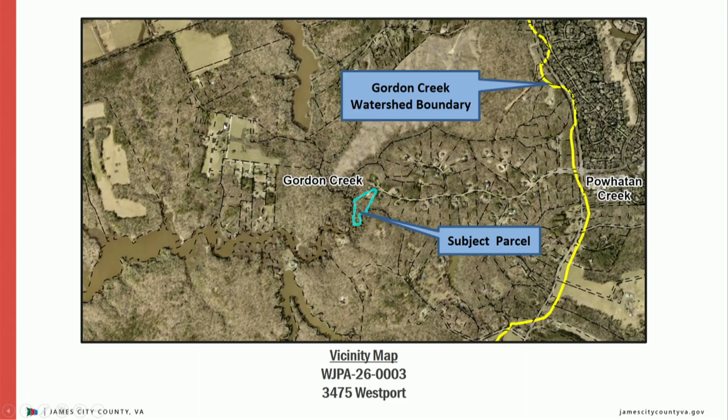A previous permit for a pier and kayak launch was approved by this board on November 10th, 2021 under WJPA 21-0043, VMRC number 21-1556. The original proposal included a pier totaling 492 square feet in length, along with a 30-foot gangway and floating dock that would transverse approximately 68 square feet of tidal wetlands.

What was constructed differs from what was approved. The area of the gangway and floating pier beyond the mean low water that was permitted was 126 square feet, but what was constructed was 243 square feet. The existing floating pier extends 7 feet channelward beyond the originally permitted edge of the pier.

So what we have here is the current as-built. I have what was originally approved outlined in gray here, along with mean high water and mean low, and the original proposed pier and floating dock.

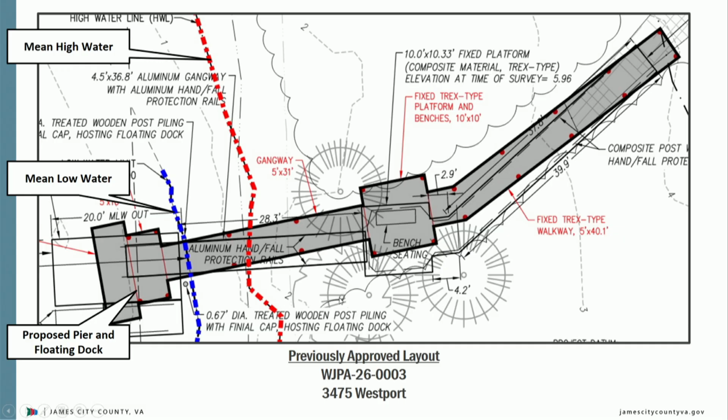And then looking at the same image again, but looking at what was actually constructed here in orange. We have that kayak launch here, along with the railings that extend out, and then the existing floating pier, and then the gangway, seating area, and walkway. And then just an overlay of the two to show you the difference between what was approved versus what's now constructed.

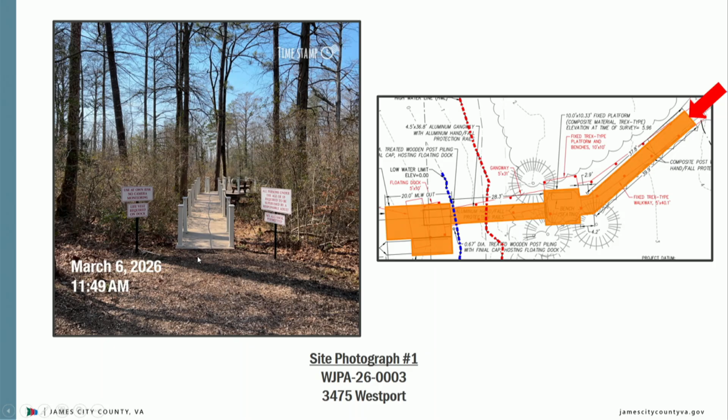And then just some current site photos. This is the entryway to that pier with the walkway here. Moving a bit further up, we have that little landing area here with the bench, as shown here. And then there's that gangway.

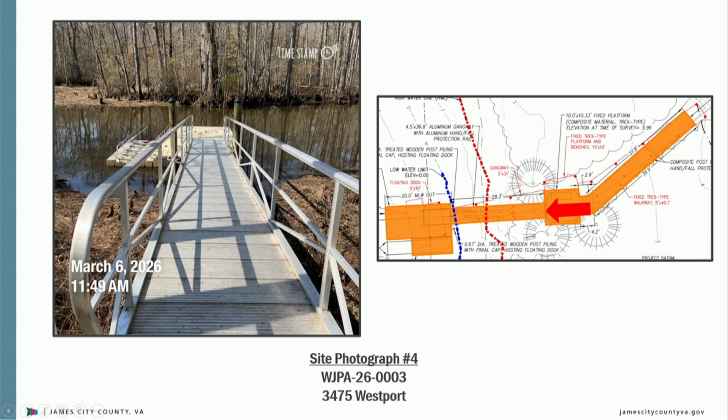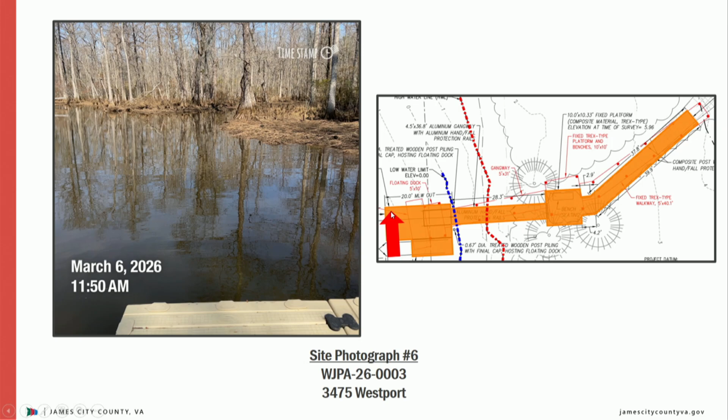Moving a bit closer, we see the floating dock along with the kayak or canoe slip. And then just a better shot of that with the railings extending outward. And then just a view from the corner, furthest extent of the floating dock, looking this way, and then from the other side, looking out that way towards the kayak boat launch.

On February 1st, 2025, the Wetlands Mitigation Compensation Policy of the Code of Virginia, Chapter 4 VAC 20-390-10 et sequitur was amended. Virginia, as a Chesapeake Bay program partner, is committed to achieve a no net loss of existing wetlands acreage and function in the signatories' regulatory programs. In order for a proposed project to be authorized to impact wetlands and compensate for the wetland loss in some prescribed manner, the following three criteria must be met.

All reasonable mitigative efforts, including alternative siting which would eliminate or minimize wetland loss or disturbance, must be incorporated in the proposal. The proposal must clearly be water dependent in nature, and must demonstrate clearly its need to be in the wetlands and its overwhelming public and private benefits.

If the proposed project cannot meet one or more of the above criteria, the project must be denied or must occur in areas outside of wetlands. Should it satisfy all three criteria, however, compensation for the wetland loss is required.

The sequence of acceptable mitigation options should be as follows: mitigation bank, approved in-lieu fee program, permittee responsible on-site and in-kind mitigation, or permittee responsible mitigation through off-site or out-of-kind mitigation within the same watershed. If compensation is required, it should be a condition of the permit.

Staff has reviewed the application and finds that this project meets the three criteria outlined above. Staff has reviewed the application and recommends approval as presented, with no additional conditions. If you have any questions, I'd be happy to take them at this time.

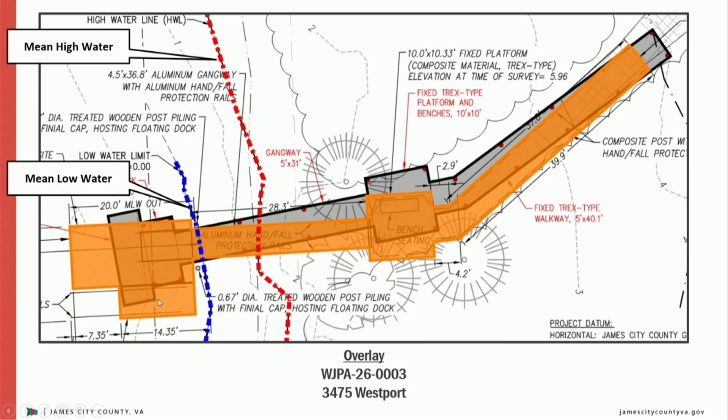The originally permitted platform that was out there was a little bit too small for the kayakers that were going out. Any questions that you have?

Questions from the board? No, appreciate that very much. Are there any comments from the public regarding this?

Okay, I will then move the discussion back amongst the board. Chairman, fairly straightforward, slight field adjustment. The portion channelward of mean low water is not in our jurisdiction, so it seems like a slight modification. No issue for me.

Okay, go ahead and close the public hearing and entertain a motion to deny or accept the proposal.

Motion to adopt the resolution to grant the permit request for Wetlands Board case number WJPA 26-0003. Wilson, motion is to adopt.

Mr. Roadley, yes. Mr. McElroy, yes. Mr. May, yes. Ms. Bowie, yes. Mr. O'Brien, yes. Motion passes 5-0.

We will now move on to board considerations. I believe we have one particular extension request. Ms. Grosjean?

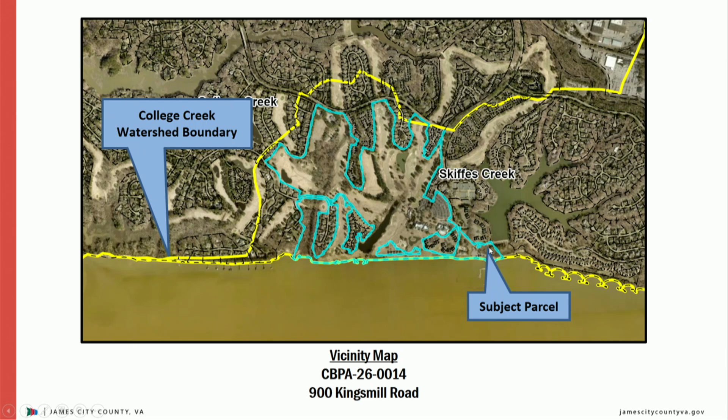Total impacts to the RPA associated with this proposal equate to 220 square feet within the 50-foot seaward RPA. Required mitigation for this amount of impervious impacts equals 1 planting unit, 1 canopy tree, 2 understory trees, and 3 shrubs. The applicant will be required to submit a mitigation plan equaling 1 planting unit, 1 canopy tree, 2 understory trees, and 3 shrubs as a condition of approval, which they have met since the publishing of the staff report.

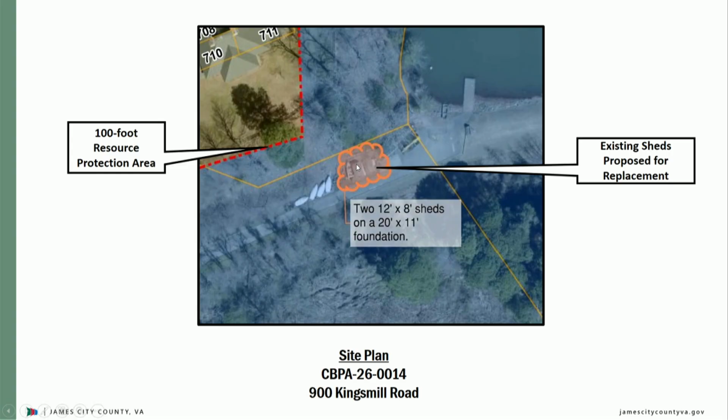Again, we have the site plan. The 2 sheds here are proposed for replacement, and this is the proposed mitigation plan. Recent photography of the site. The mitigation is proposed in this general area, and then these are the 2 sheds proposed for replacement.

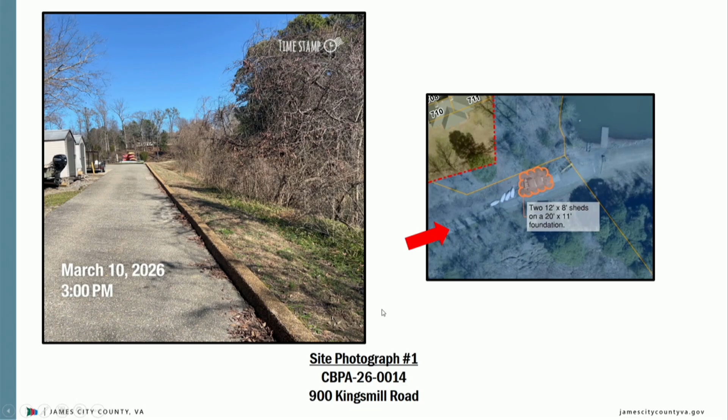Staff has evaluated the application and exception request for the installation of 2 sheds. This application meets the ordinance conditions in sections 23-11 and 23-14 and should be heard by the board because the project is outside the scope of an administrative approval.

The board may grant exceptions to section 23-7 if the application meets the following 5 conditions, which you have before you. Staff has reviewed the application and exception request and has determined the impacts associated with the proposal to be minor for the proposed development.

Staff recommends approval for this exception request, and if the board wishes to approve the request, staff recommends the following conditions be incorporated into the approval.

The applicant must obtain all other necessary federal, state, and local permits as required for the project. The applicant must submit a surety of $1,000 in a form acceptable to the James City County Attorney's Office to guarantee the mitigation plan equaling 1 planting unit, 1 canopy tree, 2 understory trees, and 3 shrubs.

The applicant must submit a mitigation plan equaling 1 planting unit, 1 canopy tree, 2 understory trees, and 3 shrubs. The applicant must obtain site plan approval from the planning division prior to installation of the sheds.

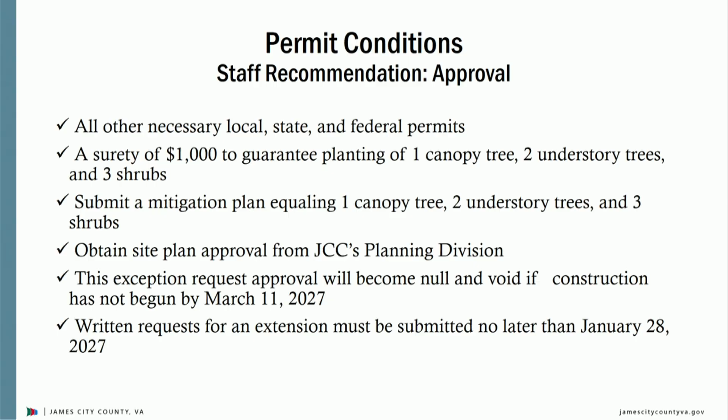This exception request approval will become null and void if construction has not begun by March 11th, 2027, and written requests for an extension to an exception must be submitted to the SRP division no later than January 28th, 2027, 6 weeks prior to the expiration date.

Be happy to take any questions at this time. Any questions for staff?

Thank you. With that, I'll open the public hearing. Would anybody care to address the board on this matter? Hearing none, I'll pull it back to the board.

Any discussion, further discussion? Chair, I think this is a reasonable request, and I would agree with the county's recommendation for approval. I concur. I will close the public hearing.

Do I have a motion? I'll make a motion to adopt the resolution to grant the exception request for Chesapeake Bay Board case number CBPA 26-0014 at 900 Kingsmill Road.

Mr. Wilson. Motion is to adopt. Mr. McElroy, Yes. Mr. O'Brien, Yes. Mr. May, Yes. Ms. Bodie, Yes. Mr. Roadley, Yes.

Motion passes 5-0. Next item on the agenda is CBPA 26-0004 at 4455 Pleasant View Drive.

Emily. Again, Board, Emily Grogine, Watershed Planner, presenting CBPA 26-0004.

Mr. Michael Powell has applied for a Chesapeake Bay exception for encroachments into the RPA buffer for the extension of a deck located at 4455 Pleasant View Drive within the Powhatan Village subdivision and the Powhatan Creek watershed.

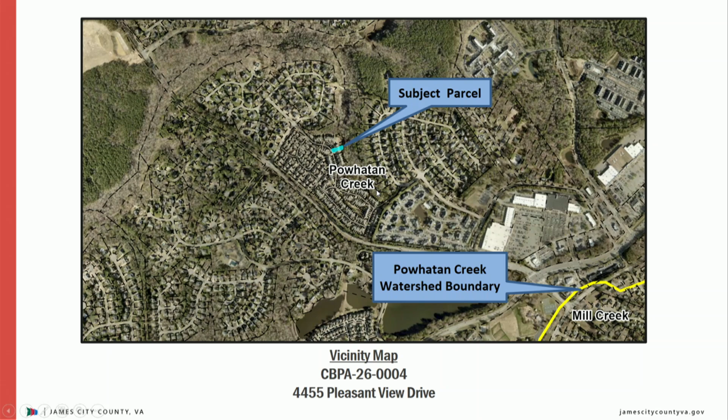Here we have that Powhatan Creek watershed boundary outlined in yellow, along with the subject parcel in blue here, which we will zoom in here with the recent aerial photography.

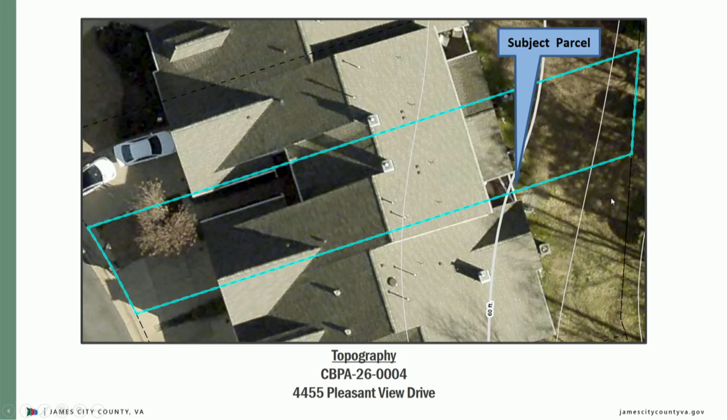The current existing 10x8 deck, along with the topography, as you can see, it kind of just slopes off to the rear right portion of the property, along with the current RPA buffer.

The 50-foot seaward starts right just past that property line, so all the work that's occurring will be strictly within the landward buffer.

The total lot size of this property is 0.076 acres, of which 39% is located within the RPA. The applicant is proposing to expand an existing 80 square foot raised deck at the back of the home by an additional 328 square feet.

Total impacts to the RPA associated with this proposal equate to 328 square feet of impacts within the landward 100-foot RPA buffer. Required mitigation for this amount of impervious impacts equals 1 planting unit, 1 canopy tree, 2 understory trees, and 3 shrubs.

Due to site restrictions, the applicant will be required to pay $500 into the county's Chesapeake Bay Mitigation Fund in lieu of physical plantings.

So we have the proposal here. I know that the line here shows it going over the property line, but that's just because GIS, as you know, can be skewed. This does not allow them to encroach on anyone's property, which they don't plan on doing.

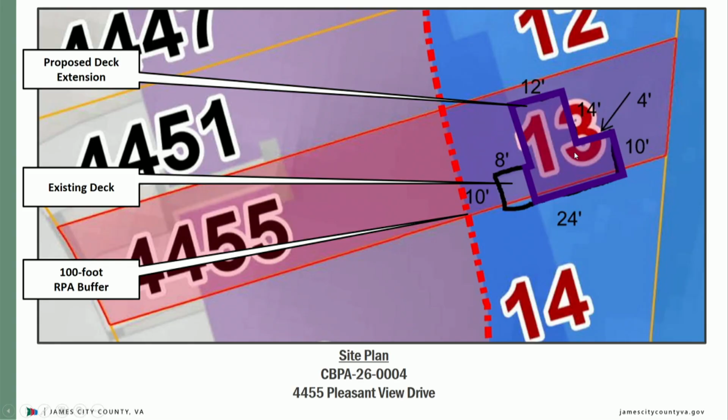This is the existing 8x10 deck, along with the proposed extension outlined in purple here. And then just a close-up as we go through these current site photos.

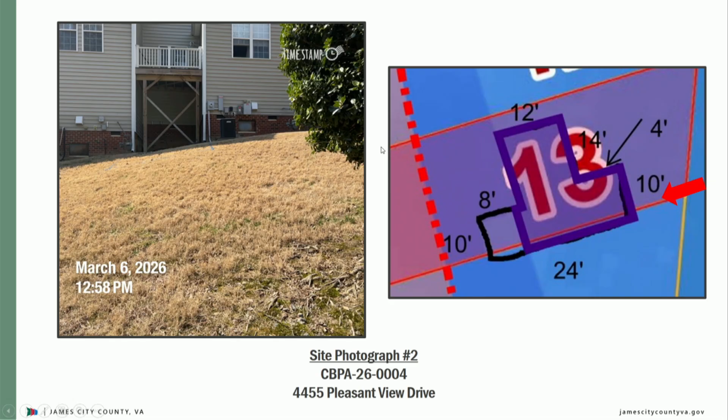So the furthest extent on this side of the deck is going to be right about here. And then the furthest extent on the other side is going to be right about here, toeing that property line. Then just moving closer in where it's going to connect to the existing deck here.

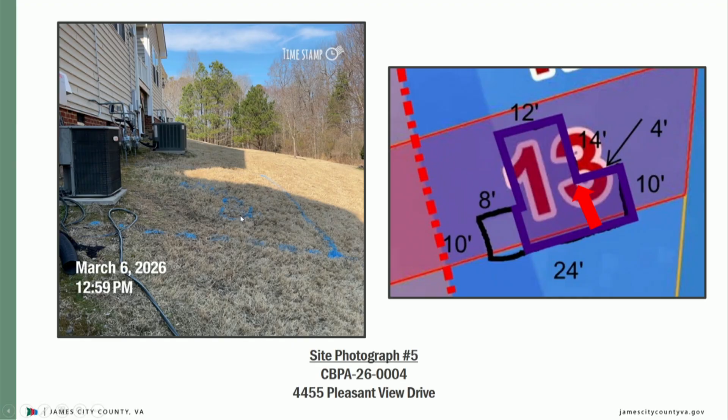You can see it's kind of marked out in blue. And then just turning to the right to see that furthest extent corner. And then moving over here to look at the proposed portion here, where it'll end right about here. And then just looking at from the other side, again, just showing you kind of that outline of the extent of the proposed deck extension.

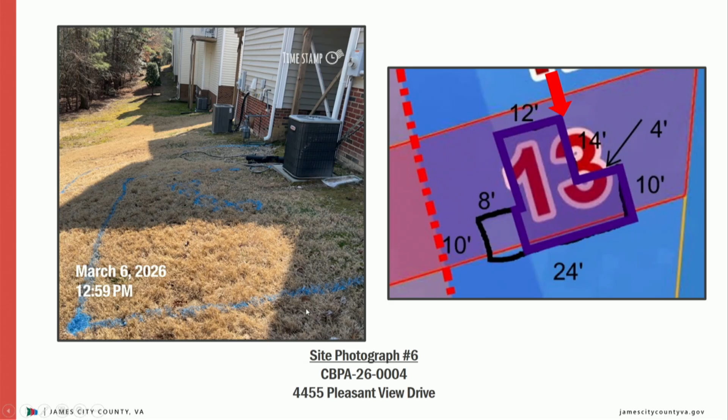Staff has evaluated the application and exception request for the extension of a deck. This application meets the ordinance conditions in sections 23-11 and 23-14 and should be heard by the board because the construction of a deck is accessory in nature.

The board may grant exceptions to 23-7 if the application meets the five conditions outlined before you. Staff has reviewed the application and exception request and determined the impacts associated with the proposal to be minor for the proposed development. Staff recommends approval for this exception request, and if the board wishes to approve, staff recommends the following conditions be incorporated into the approval.

The applicant must obtain all other necessary federal, state, and local permits as required for the project. The applicant must submit a payment of $500 to the county's Chesapeake Bay Mitigation Fund in lieu of mitigation plantings. The applicant must permanently stabilize denuded soil underneath the deck to prevent erosion.

This exception request approval will become null and void if construction is not begun by March 11, 2027, and written requests for an extension must be submitted to the Stormwater and Resource Protection Division no later than January 28, 2027, or six weeks prior to the expiration date. If you have any questions, I'd be happy to take them at this time.

Any questions for staff? I do have one. Are there other decks similarly situated that extend out into the RPA in this area? For that section of townhomes, not from what I saw.

This references permanent stabilization underneath the deck. Is there a recommendation of what that should look like? Typically it's some sort of crushed gravel or mulch. We're kind of leaving it vague, so it's up to the applicant, whichever suits their needs best.

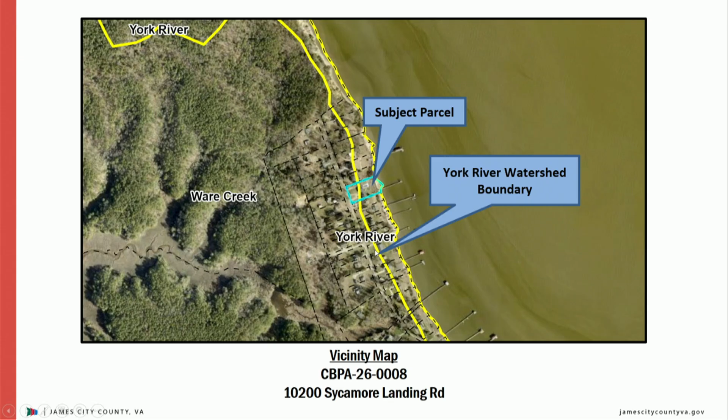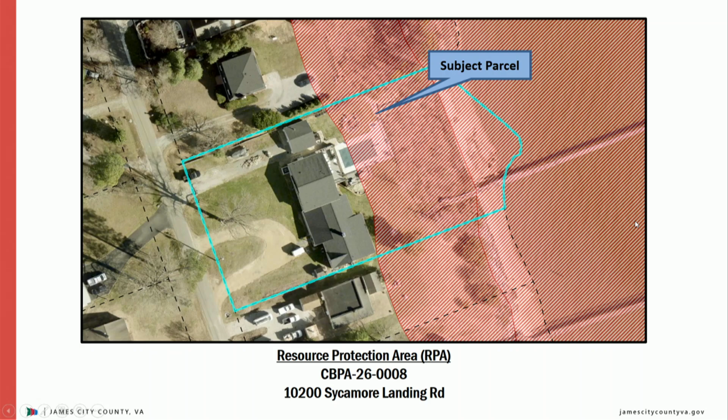Here we have a vicinity map showing the subject parcel outlined in blue and the watershed boundary in yellow. Looking closer at the property, this is the project area, current topography, RPA, and FEMA floodplain.

The total lot size of this property is 0.86 acres, of which 40% is located within the RPA. The applicants are proposing to construct a retaining wall behind the existing dwelling to stabilize the yard above an existing retaining wall.

Total impacts to the RPA associated with this proposal equate to 170 square feet of new impervious in the landward 50-foot RPA. Required mitigation for this amount of impervious impacts equals half a planting unit. The applicants have submitted a mitigation plan equaling half a planting unit, 2 understory trees and 2 shrubs, therefore satisfying county mitigation requirements. The previously existing unapproved fire pit shown in the previous photos

has already been removed and is not proposed to be replaced. Here we have the site plan showing that fire pit is proposed to be removed and not reconstructed.

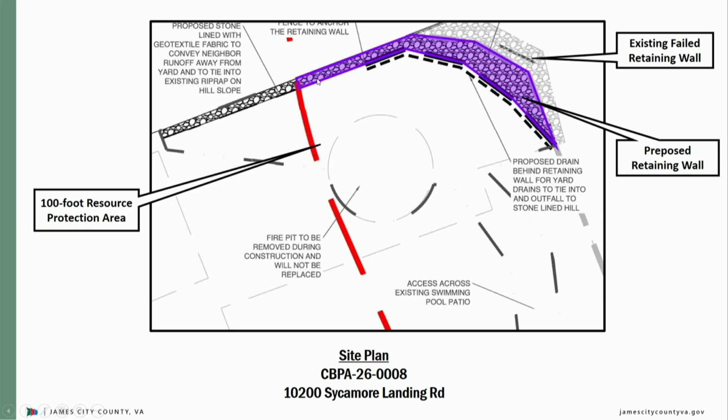And this is the proposal for the new retaining wall here, and the proposed mitigation plan here. A section of the retaining wall showing the existing here and the new construction here.

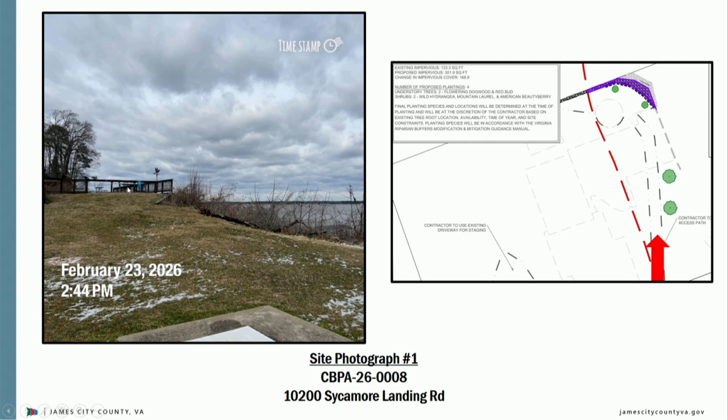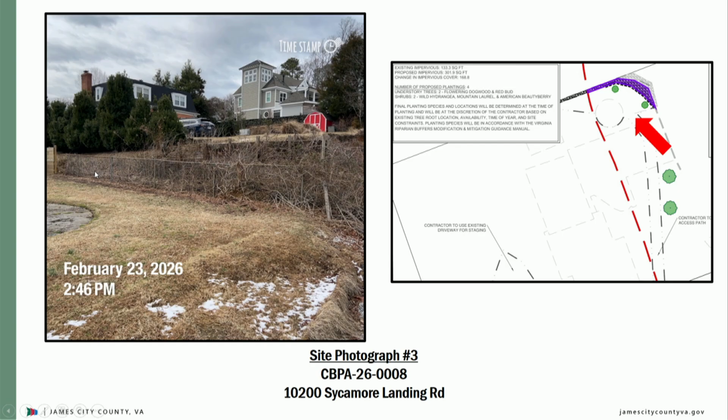Recent site photos. Here you can see where the 2 understory trees are proposed, the previously existing fire pit, and then looking back towards the beginning of the retaining wall, coming along this fence here and around this area. The existing failed retaining wall, and then the slope behind it.

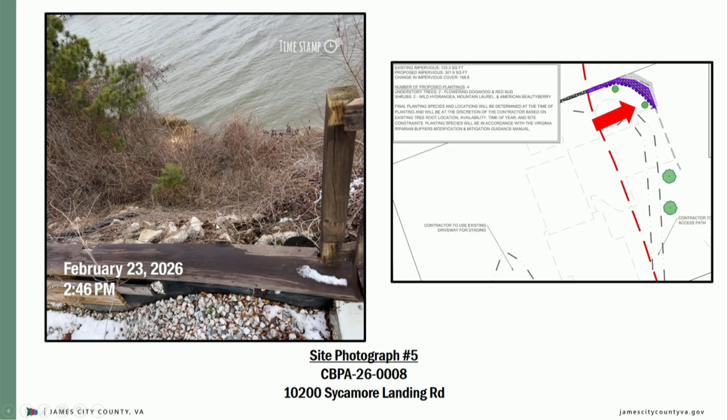Staff has evaluated the application and exception request for the construction of a retaining wall. This application meets the ordinance conditions in sections 23-11 and 23-14 and should be heard by the board because the construction of a retaining wall is considered accessory in nature.

The board may grant exceptions to section 23-7 if the application meets the following 5 conditions, which you have before you. Staff has reviewed the application and exception request and has determined the impacts associated with the proposal to be minor for the proposed development.

Staff recommends approval for this exception request, and if the board wishes to approve the request, staff recommends the following conditions be incorporated into the approval.

The applicant must obtain all other necessary federal, state, and local permits as required for the project. The applicants must submit a surety of $500 in a form acceptable to the James City County's Attorney's Office to guarantee the mitigation plan equaling 2 understory trees and 2 shrubs.

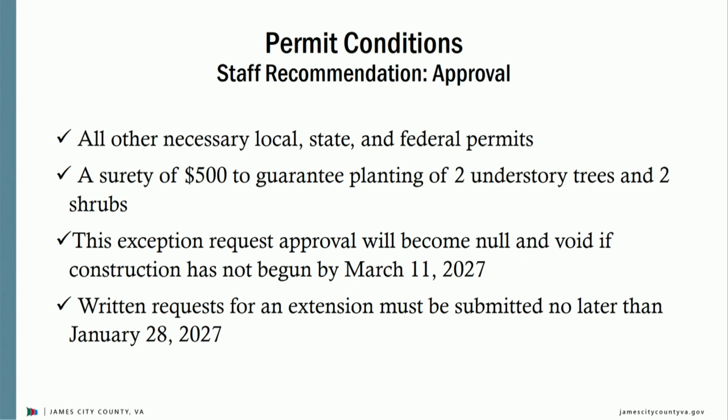This exception request approval will become null and void if construction has not begun by March 11th, 2027. Written requests for an extension to an exception must be submitted to the SRP division no later than January 28th, 2027, 6 weeks prior to the expiration date. I'd be happy to take any questions at this time.

Questions for staff? You indicated the existing retaining wall is going to stay there - does that provide any benefit? I will defer that to the applicant.

Other questions for staff? Could you go back to the cross-section drawing of the proposed structure? They're retaining the existing wall - will the soil be removed and replaced, or removed and left out of there? I'll defer that to the applicant.

Okay, and these are horizontal alignment of the boards for the retaining wall as opposed to being driven? Okay, I'll defer that to the applicant. I don't have any more questions then.

Thank you. With that, I'll open the public hearing. Would the applicant care to address the board?

Hello, Karen Hall, 7501 Mill Trail Road, Charles City, Virginia. Can you repeat your questions? I'm happy to answer them.

So is the fill that's being removed going to be replaced? It's not anticipated to be replaced. The reason the existing retaining wall is to remain is you saw how sheer that slope is - just to avoid any disturbance on that side of the wall; pulling anything out to disturb it further was not the intent, but the existing wall has failed. Will that area just be revegetated? I think I show proposed riprap on the downslope side of the proposed wall, so that even though that existing retaining wall has failed, there'll be nothing but riprap cover there to facilitate any drainage that comes through there.

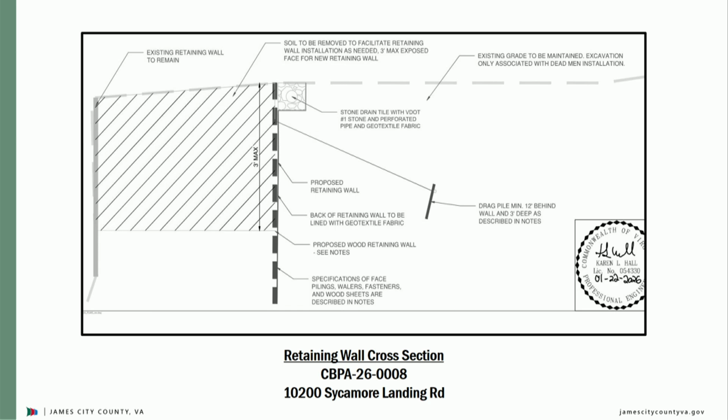And is the surface drain, you think, enough to keep the hydraulic head from impacting the wall? I think so. We evaluated a drop inlet, but it seemed excessive for what was going on there.

Questions? Very much, thank you. Would anybody else care to address the board on this matter? With that, I will pull the discussion back to the board.

Seem to have an issue that they're wrestling with. The stone does make the area of encroachment a little bit wider as it's shown on the plan view, which helps clarify for me why we were showing such a large area.

But that's all behind where the existing wall is now, correct? Right, yeah. I don't particularly have an issue with this. I think it's necessary.

With that, I will close the public hearing. The matter is before the board. Do I have a motion?

Make a motion to adopt the resolution to grant the exception request for Chesapeake Bay Board case number CBPA 26-0008 at 10-200 Sycamore Landing Road.

Mr. Wilson? Motion is to adopt. Mr. McElroy? Yes. Mr. O'Brien? Yes. Mr. May? Yes. Ms. Bowie? Yes. Mr. Roadley? Yes. Motion passes 5-0. Next item on the agenda is CBPA 26-0012 at 110 Archer's Hope Drive.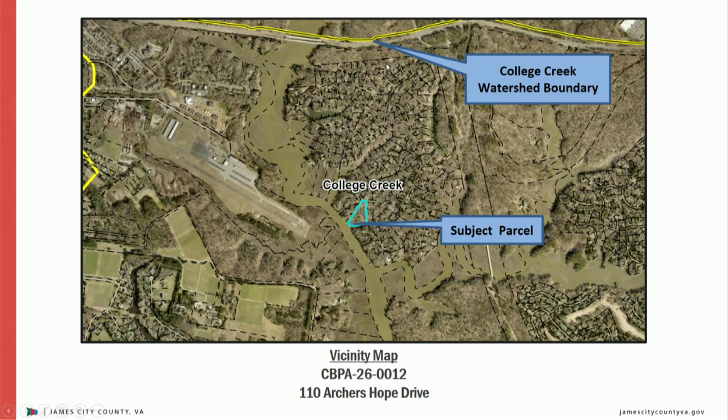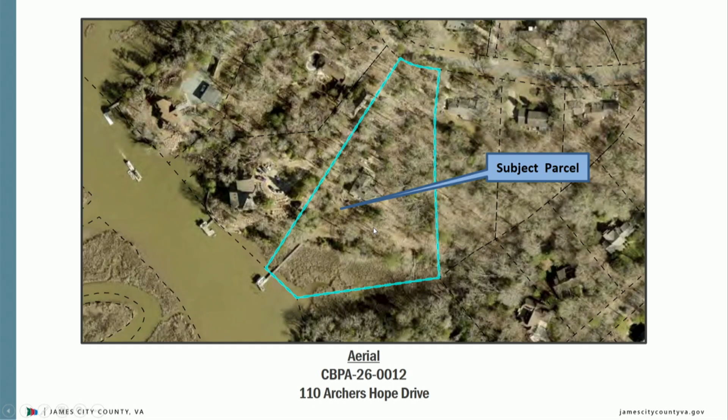We have that subject parcel, as usual, outlined in blue, along with that watershed boundary outlined in yellow. Moving further into recent aerial photography, you can see an existing dock, and then this is the area of focus for the proposal, along with the existing topography, as you can see it kind of just slowly slopes back towards the rear of the property, towards the water.

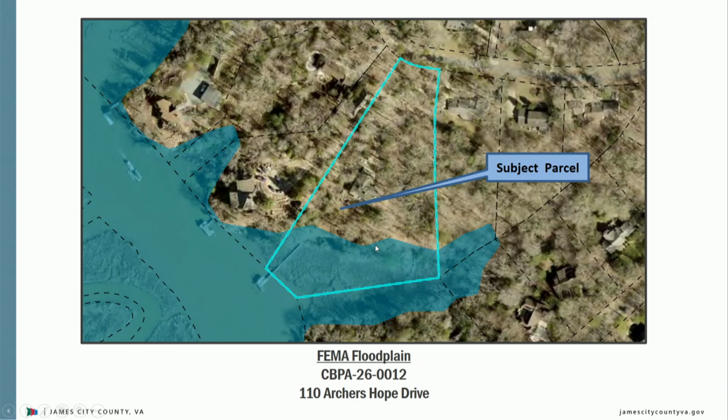And then the current RPA buffer, along with the FEMA floodplain, which is zone AE with a base flood elevation of 7 feet.

The total lot size of this property is 3.056 acres, of which 52% is located within the RPA. The parcel was platted in 1973, prior to the adoption of the Chesapeake Bay Ordinance in 1990. The applicants are proposing to construct 2 retaining walls, stairs, and a walkway.

Total impacts to the RPA associated with this proposal equate to 411 square feet of impacts in the landward 100-foot RPA, and 395 square feet of impacts in the seaward 50-foot RPA, for a total of 806 square feet of total impacts to the RPA.

Required mitigation for this amount of impervious impacts equals 2 planting units, or 2 canopy trees, 4 understory trees, and 6 shrubs. The applicants have proposed a mitigation plan equaling 2 understory trees and 55 shrubs. This exceeds the county's mitigation requirements.

So we have the site plan here before you. All of the proposed work to take place within the 100-foot landward buffer is outlined in purple. If you look at these little dots here, they're a landscape feature, basically big boulders, so we wanted to account for those impervious impacts, as well as the retaining wall.

The first one here, along with the stairs and walkway, which continues into the seaward RPA buffer outlined in orange, with stepstones that go up to that existing dock.

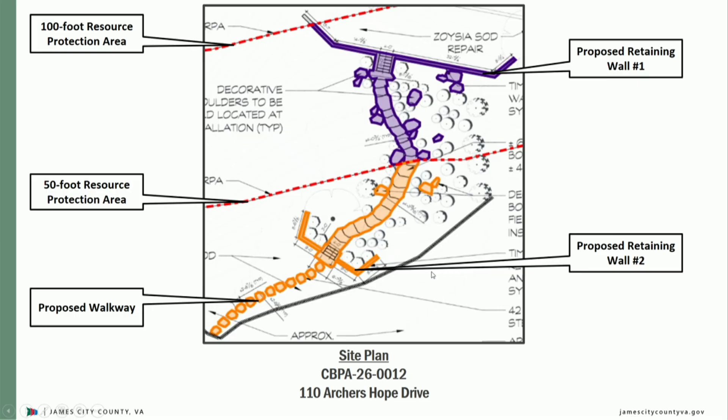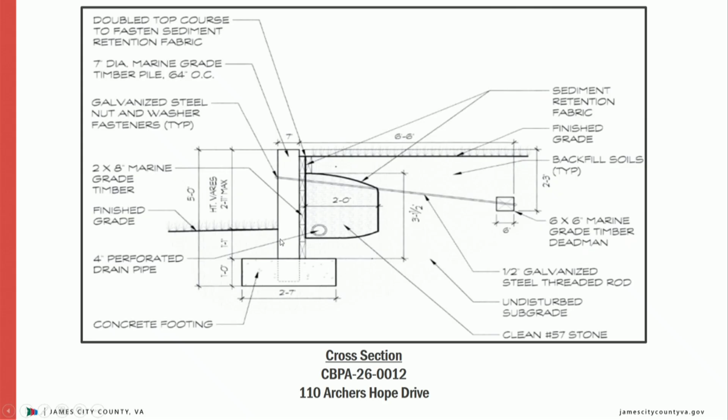And then just some recent site photography showing existing conditions on the site. There is a 3rd existing retaining wall towards the top of the house. It's cut off right about here in this screenshot.

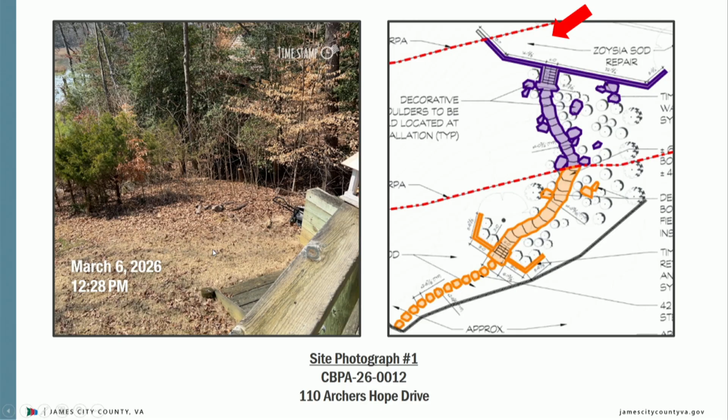So standing from the top of that, just to give you an idea of where that 100-foot RPA buffer starts, as well as the extent of that first proposed retaining wall is, and then moving down, again, looking at kind of the alignment of where that first retaining wall will go.

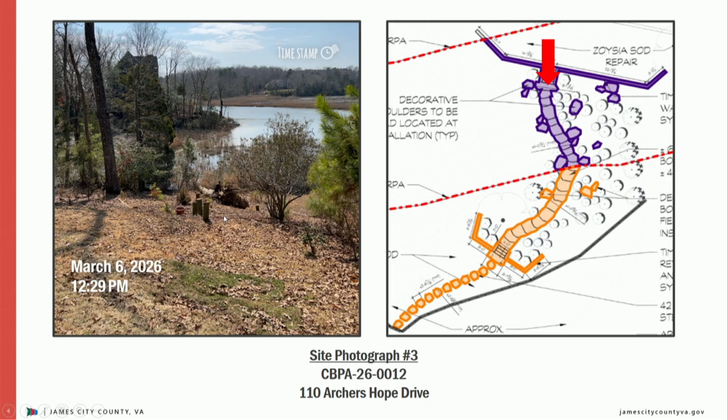And it gives you an idea as well of the slope on the property. And then just looking more direct towards the water, kind of following that proposed path. There's sort of an existing one, but as we go through these photos, you'll see the existing condition of it.

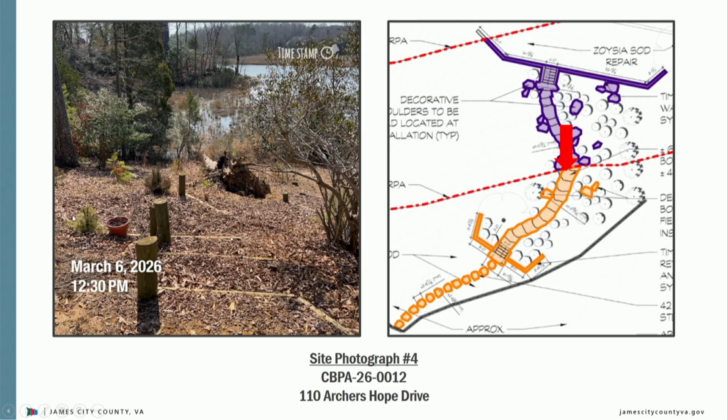Just moving closer on those stairs, again, just following the current proposed pathway. We're about to go into the 50 seaward here, and then moving further in, there's that existing dock with the stepstones that'll be proposed here. And this is about where that second retaining wall in orange will be placed.

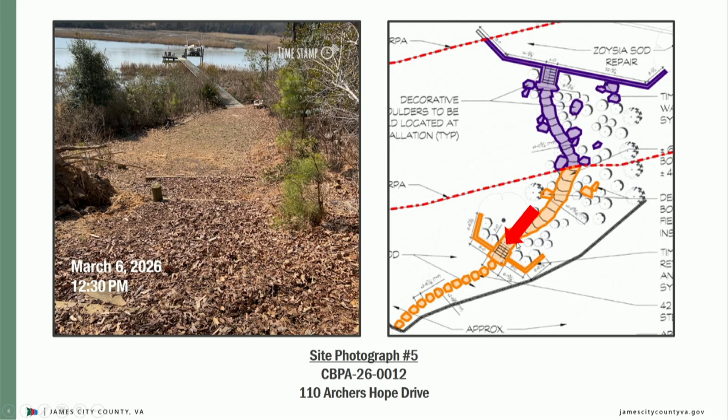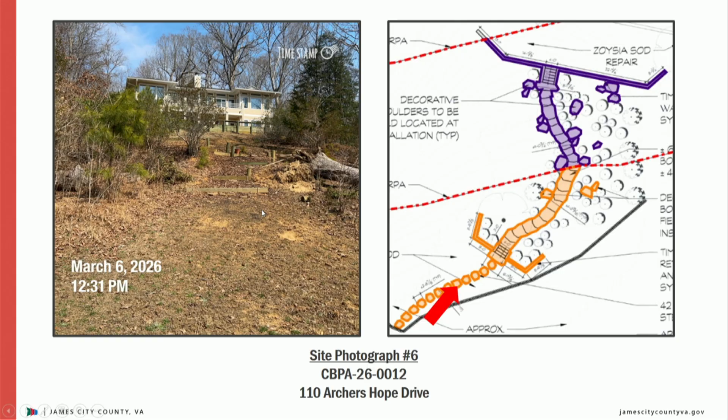And then just an uphill shot of everything showing existing site conditions from about halfway through where those proposed stepstones will go, looking up towards the house and a proposed pathway. And then just a little bit further up, standing again where that second proposed retaining wall will be.

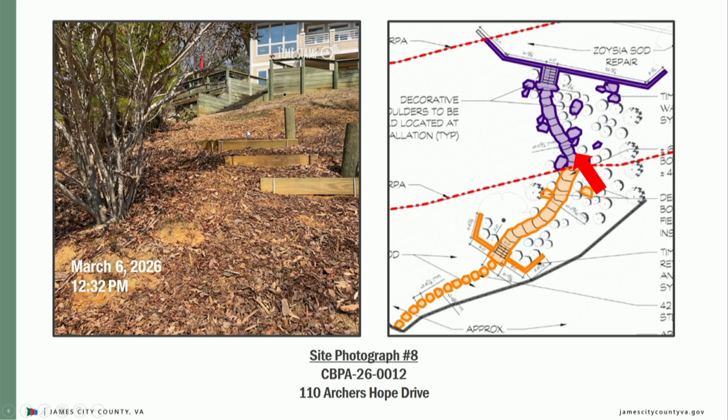And then just moving back up, again, that first retaining wall will be placed right about here with the proposed walkway and stairs coming down this way towards the water. And then again, just another shot to show that existing retaining wall that I mentioned previously that's not within the RPA. And then just the existing grade on the site.

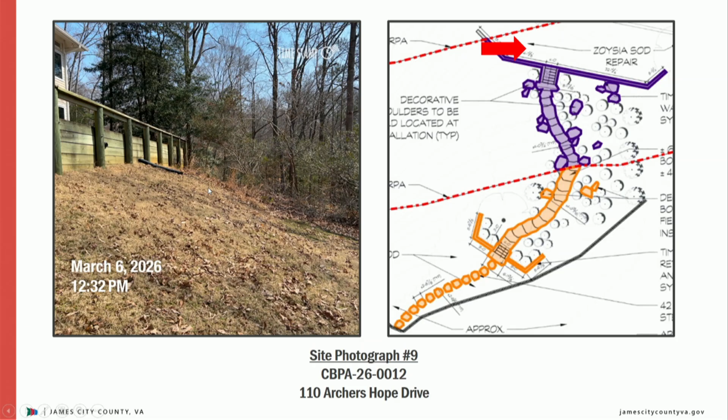Staff has evaluated the application and exception request for the construction of 2 retaining walls, stairs, and a walkway. This application meets the ordinance conditions in sections 23-11 and 23-14 and should be heard by the board because the construction of retaining walls, stairs, and a walkway is accessory in nature. The board may grant exceptions to section 23-7 if the application meets the following 5 conditions outlined before you.

Staff has reviewed the application and exception request and has determined the impacts associated with the proposal to be moderate for the proposed development. Staff recommends approval for this exception request, and if the board wishes to approve that request, staff recommends the following conditions be incorporated into the approval.

The applicants must obtain all other necessary federal, state, and local permits as required for the project. The applicants must submit a surety of $3,750 in a form acceptable to the James City County Attorney's Office to guarantee the mitigation plan equaling 2 understory trees and 55 shrubs.

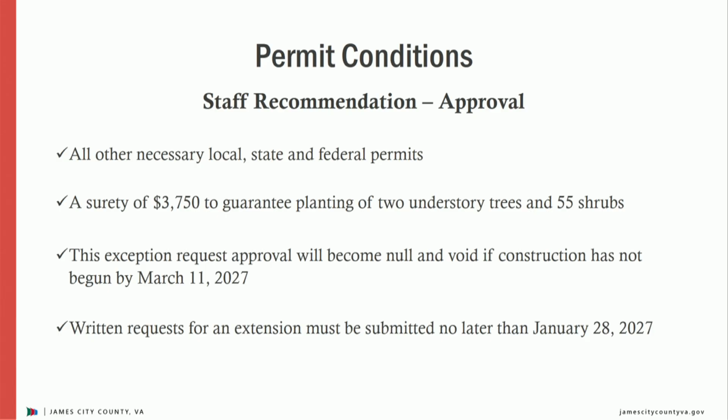This exception request approval will become null and void if construction is not begun by March 11th, 2027, and written requests for an extension to an exception must be submitted to the SRP division no later than January 28th, 2027, which is 6 weeks prior to the expiration date. If you have any questions, I'd be happy to take them at this time.

Questions for staff? Really well presented, thank you.

I'll open the public hearing. Would the applicant care to address the board?

How you guys doing? Good. Please state your name and address for the record. My name is Mitch Foose. I'm the owner of the King's Garden, and this is Sarah Lamb.

She's the designer. Basically the hillside is eroding, it's all open soil, so we're proposing retention walls to lessen the slope to mitigate the erosion. And we're trying to create a pathway for the owners to safely get down from their house to the dock. We're going to be doing a lot of mitigation planting to hold the hillside down, along with the inclusion of boulders so that those can be dug into the hill and act as stabilization as well.

In addition to the stepping stones, is there mulch applied as well? I noticed they had some mulch down now. So there will be mulch applied in the middle of the 3 sections. The top section above the first retention wall is going to be zoysia sod. And then the lower section where the stepping stones go from the lower retention wall to the dock is also going to be zoysia sod.

What's the elevation of the retaining walls? Less than 3 feet on the top one, just a little under 3 feet, and the bottom one should be about 2.5 feet. Step down from those, from the walkway through some steps, or just? Yeah, so the staircase that was shown in the plan is going to be a stacked stone staircase, so it's going to be big slabs of stone that are stacked on each other.

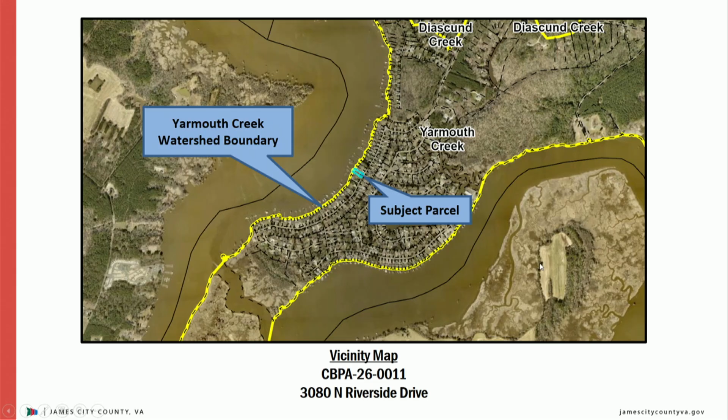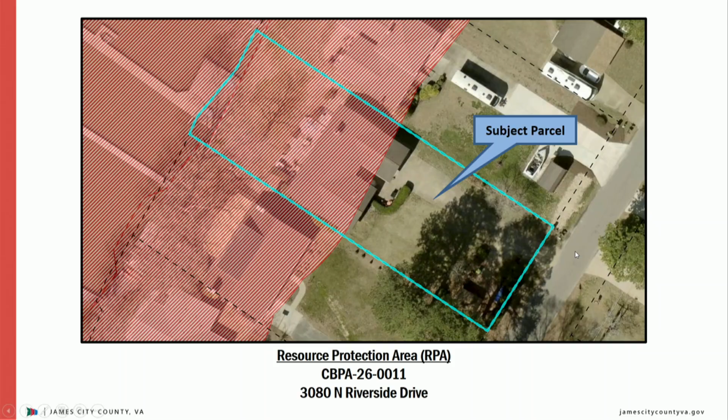We have the vicinity map with the subject parcel outlined in blue, and the watershed boundary outlined in yellow. A closer aerial image of the property with the project area in this general location. Current topography, RPA, FEMA floodplain.

The total lot size of this property is 0.395 acres, of which 48% is located within the RPA. The applicant is proposing to construct an in-ground pool and to remove existing decks and a pump house structure within the RPA.

These existing structures equate to approximately 764 square feet of existing impervious within the 50-foot landward RPA and approximately 80 square feet of existing impervious within the 50-foot seaward RPA.

The applicant is proposing to construct a 1,440 square foot in-ground pool and pool deck behind the existing dwelling, where the existing decks are currently located.

Total new impacts to the RPA associated with this proposal equate to approximately 116 square feet of new impacts to the landward 50-foot RPA, approximately 496 square feet of new impacts to the seaward 50-foot RPA, for an approximate total of 612 square feet of new impacts to the RPA.

Required mitigation for this amount of impervious impacts equals 1.5 planting units: 1 canopy tree, 2 understory trees, and 9 shrubs. The applicant has proposed a mitigation plan of 2 canopy trees, 4 understory trees, and 6 shrubs, thus exceeding the county's mitigation requirements.

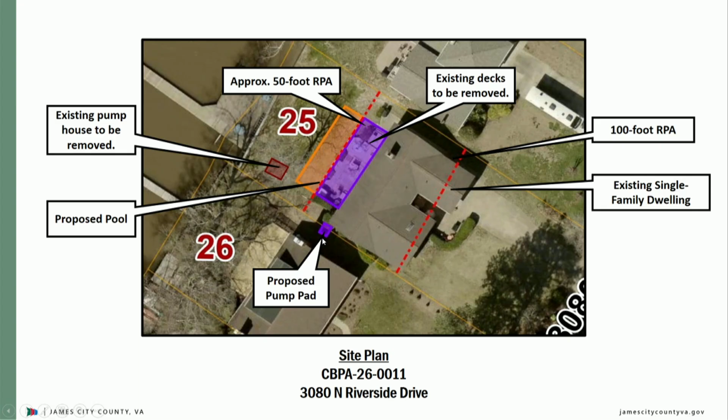This is the existing pump house that is proposed for removal and the proposed pump pad for the pool. This was the submitted mitigation plan with the mitigation plantings on the side of the property line.

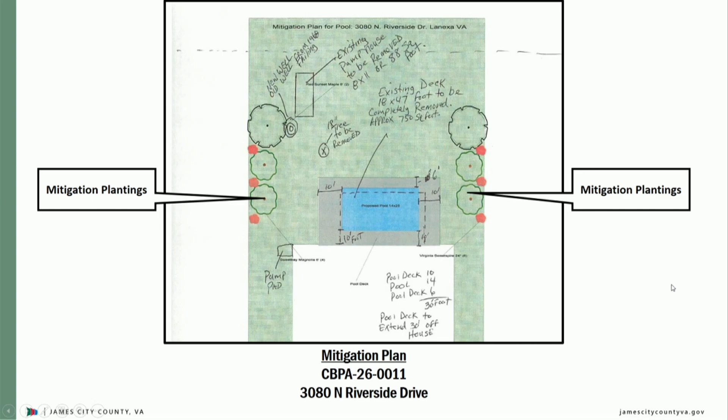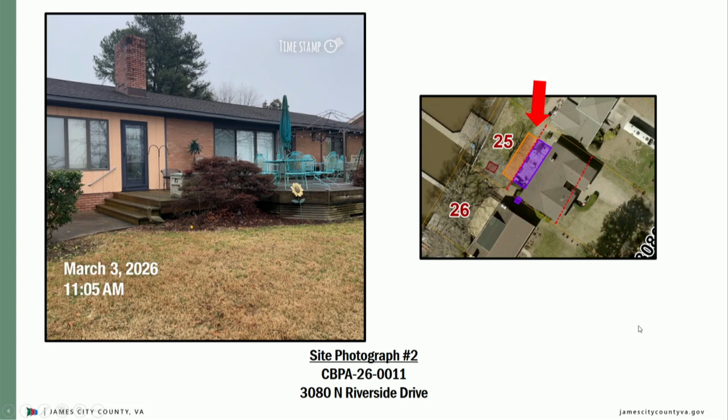Photography of the site. Here we have the side yard going around to the back, the existing decks, showing the rest of the existing decks, and then the area where the pool is proposed. I have some markers here and here showing the limits of the proposed pool and pool deck.

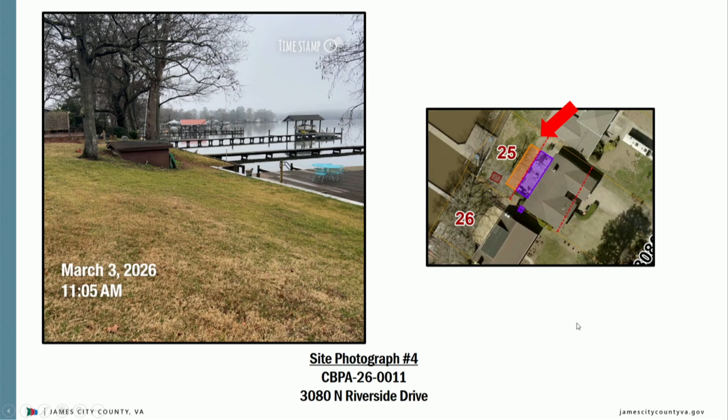And then looking back downslope towards the water, and looking back towards the existing deck and the limits of the proposed pool.

Staff has evaluated the application and exception request for the construction of an in-ground pool. This application meets the ordinance conditions in sections 23-11 and 23-14 and should be heard by the board because the construction of a pool is considered accessory in nature.

The board may grant exceptions to section 23-7 if the application meets the following 5 conditions, which you have before you.

Staff has reviewed the application and exception request and has determined the impacts associated with the proposal to be major for the proposed development. Staff finds the current proposal to be excessive and more than necessary to afford relief.

However, if the board wishes to approve the request, staff recommends the following conditions be incorporated into the approval. The applicant must obtain all other necessary federal, state, and local permits as required for the project.

The applicant must submit a surety of $2,000 in a form acceptable to the James City County Attorney's Office to guarantee the mitigation plan equaling 2 canopy trees, 4 understory trees, and 6 shrubs.

This exception request approval will become null and void if construction has not begun by March 11th, 2027. Written requests for an extension to an exception must be submitted to the Stormwater and Resource Protection Division no later than January 28th, 2027, 6 weeks prior to the expiration date.

That concludes the presentation. Any questions for staff?

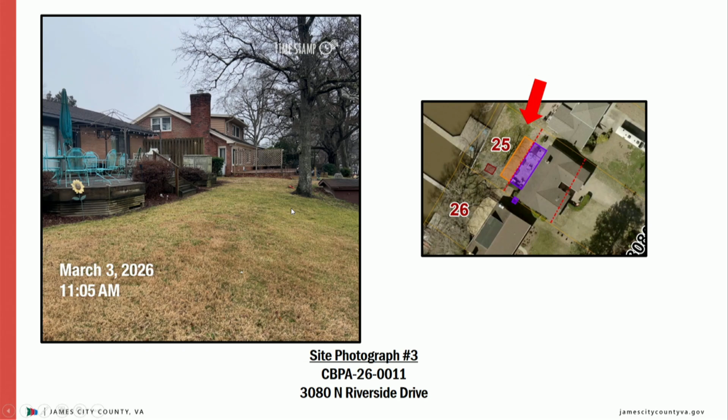Based on field measurements. So that tree's going to be removed? We were not provided with a plan that states that. However, removed or die, either one, because you're going to chop through the roots, I would think. I think there was a note in that sketch that said a 16-inch tree to be removed. Was that in the sketch here? Oh, I am, it's an 18-inch tree to be removed, thank you for the correction.

Gradual slope down to the bulkhead? That's a fair assessment? There you go.

Pump house, what is that associated with currently? I will defer that to the applicant.

Any other questions for staff? Thank you very much. I will open the public hearing. Would the applicant care to address the board?

Scott, could you state your name and address please? Scott Grimes, for the record, 3080 North Riverside Drive, Chickahominy Haven.

We didn't come to the decision to put a pool in lightly, but the water quality in the river is such now we can't swim in it anymore. In June and July, the water quality is poor, with the old septic tanks in the neighborhood and stuff like that, we struggle to swim in the summertime.

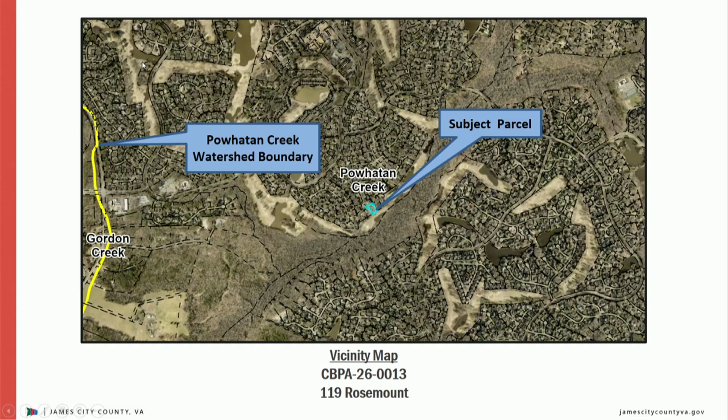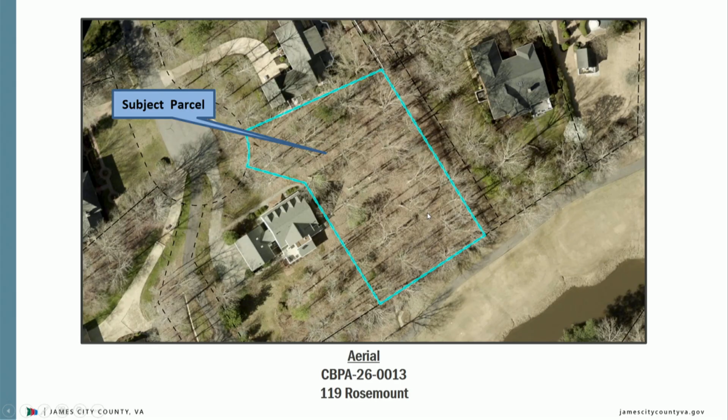We have that subject parcel outlined in blue here, along with the Powhatan Creek watershed boundary highlighted in yellow. Moving further into the parcel, we can see the existing aerial photography along with the existing topography, as you can see, it's fairly flat.

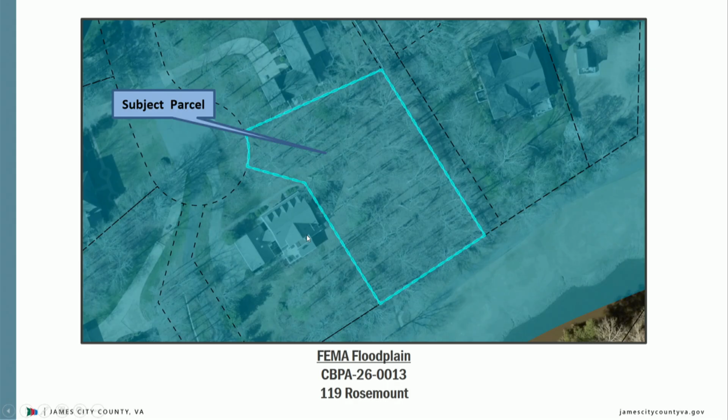The current RPA buffer, the total lot size of this property is 0.573 acres, of which 98% is located within the RPA. Then we have the FEMA floodplain here. It's located in Zone AE with a base flood elevation of 7 feet. And then the current site plan.

The applicant is proposing to construct a single-family dwelling with a patio. Total impacts to the RPA associated with this proposal equate to 1,280 square feet of impacts to the landward 100-foot RPA, 3,552 square feet of impacts to the seaward 50-foot RPA, for a total of 4,832 square feet of impacts to the RPA buffer.

The maximum first floor square footage for a single-story home in this section of Ford's Colony is 1,500 square feet. This proposal has a first floor square footage of 1,533 square feet, a 2.2% increase.

Required mitigation for this amount of impervious impacts equals 12 planting units, or 12 canopy trees, 24 understory trees, and 36 shrubs. The applicant has proposed a mitigation plan equaling 12 planting units, specifically 2 canopy trees, 8 understory trees, and 18 shrubs. This meets the county's mitigation requirements.

Due to the environmental sensitivity of the lot, staff will be requiring the installation of a 6-foot chain link fence along the limits of wetlands prior to construction and the recordation of an affidavit at the Williamsburg-James City County Courthouse prior to the release of surety.

Additionally, denuded soil underneath the proposed patio must be permanently stabilized prior to the release of surety.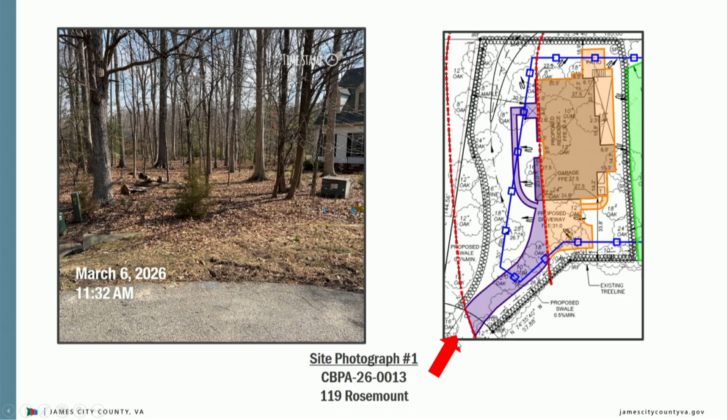And then just some recent site photography, kind of starting at the beginning of the driveway where the cul-de-sac is. It's a little cut off by my screenshot, but moving forward, these are the rough corners of the house that have been staked out. So this is kind of like standing in the proposed driveway, looking towards the front of the home, along the front of the home, I should say, where the walkway and everything will go.

That corner staked here is right about here, and then moving to that stake, just again looking further closer to the other rough corner of the home that's located here. You can faintly see it with the orange staking, but I have more photos that will show that later.

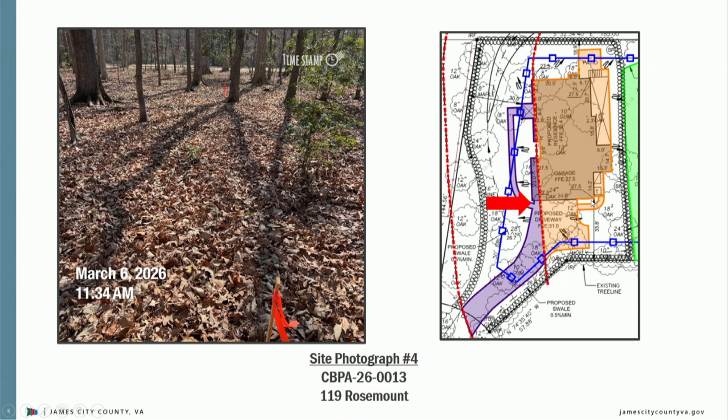And then just turning to the right and looking up the side of the house to that other rough corner here that's staked out. And then as we move closer to that stake, you can see kind of where that limit is, where the wetland line is, and the space between that corner of the house and the edge of the limits of clearing.

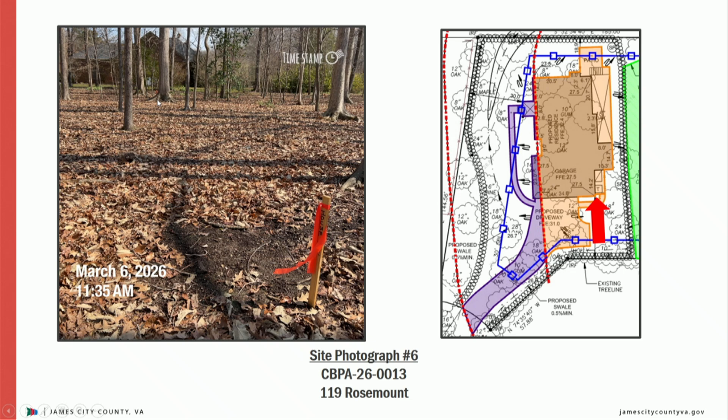And then just turning to the left, looking at the extent of the house in the rear, we'll have part of the house kind of come out right about here, which extends to that screen porch. And then the other corner of the home is located down here. So moving to that, this is showing that rear corner here where that proposed patio will be placed, along with the stairs.

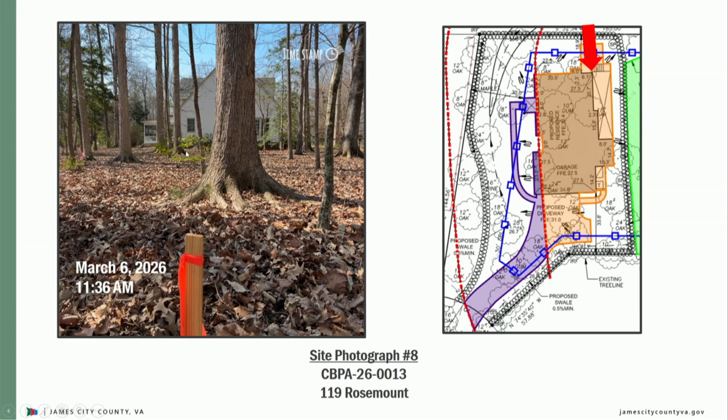And then going from the other side, looking back up that rear portion of the home where the corner of the house is staked, again showing the limits of wetlands and the space between the LOD and limits of disturbance, and where that proposed portion of the house extends to.

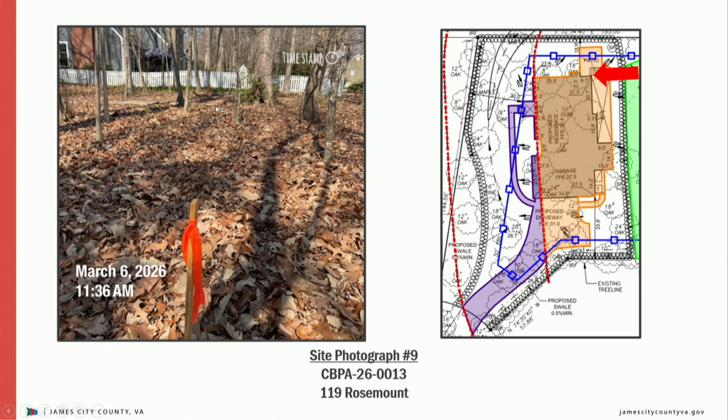And then just looking again from that back corner down the side of the property line where the patio is to the front corner here. And then just looking back up that way to give you a better idea of where the corner of the home is and where that patio will come out on the side here.

Staff has evaluated the application and exception requests for the construction of a single-family dwelling and patio. This application meets the ordinance conditions in sections 23-11 and 23-14 and should be heard by the board because the construction of a new single-family dwelling and patio in the seaward 50-foot RPA cannot be approved administratively. The board may grant exceptions to section 23-7 if the application meets the following 5 conditions outlined before you.

Staff has reviewed the application and exception request and has determined the impacts associated with the proposal to be major for the proposed development. If the board wishes to approve the request, staff recommends the following conditions be incorporated into the approval. The applicant must obtain all other necessary federal, state, and local permits as required for the project.

The applicant must submit a surety of $6,000 in a form acceptable to the James City County Attorney's Office to guarantee the mitigation plan equaling 12 planting units, or 2 canopy trees, 8 understory trees, and 108 shrubs.

A 6-foot chain link fence must be installed along the limits of wetlands prior to the start of construction. Denuded soil underneath the proposed screen porch must be permanently stabilized prior to the release of surety. The applicant must record an affidavit at the Williamsburg-James City County Courthouse prior to the release of surety.

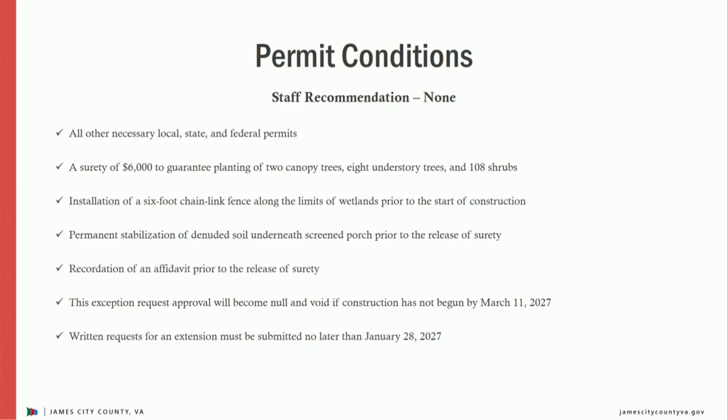This exception request approval will become null and void if construction is not begun by March 11th, 2027, and written request for an extension to an exception must be submitted to the SRP division no later than January 28th, 2027, which is 6 weeks prior to the expiration date. If you have any questions, I'd be happy to take them at this time.

Questions for staff? Could you show a particular slide with the floodplain? Is it completely in it, right? Or adjacent properties? Go one slide back.

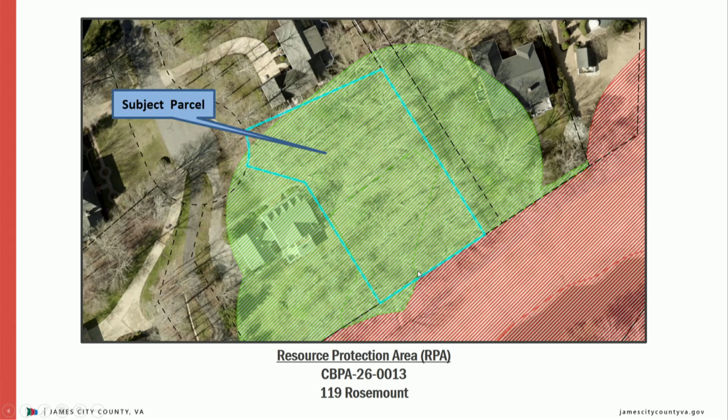Done. I'll open the public hearing.

Mr. Grog? We're not done, sorry.

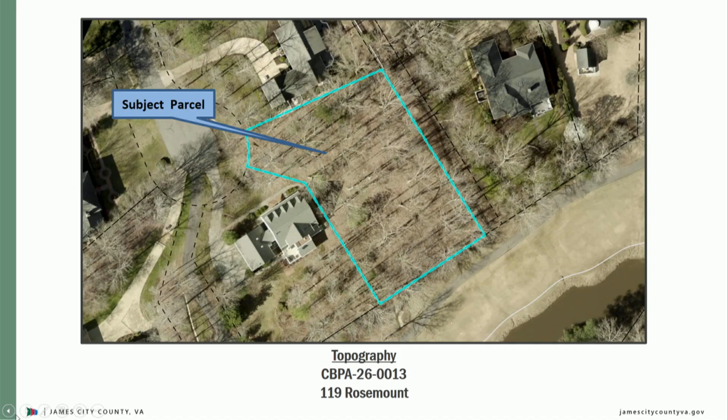So orienting you again, that concrete ditch is in this back area. That's the main channel from Ford's Colony. So the goal of this site plan was to get this drainage to go into a swale in the front, and then you'll have an A-frame roof. So this roof drainage would come in the front and then go into that channel and around.

You would have a portion of this landing as well as the back of the house that would drift, filter through the wetlands basically. But it's in essence just a pocket of wetlands because on the back of our property, it hits the concrete, goes under the golf course and into a BMP. Does that cover it? Yes.

Mr. Groggs, what's the square footage of the proposed residence? The square footage of the proposed residence, as staff mentioned, is just over 1,500 square feet. It doesn't include the garage.

Seems significantly smaller than the adjacent properties, is that? Yeah, for this particular one, since we were right in line with those guidelines for Ford's Colony, I know in the past I've gone through the other square footages for reasonable comparison, but since we were right in line with that, I wasn't overly concerned with that in this particular instance. But I would agree, since we're there, most likely everything around us is only bigger.

Are oak trees pre-existing in the wetlands, or are they part of the mitigation plan? Everything on this page that you're looking at are existing trees. So yeah, basically the whole back half of the lot will remain vegetated.

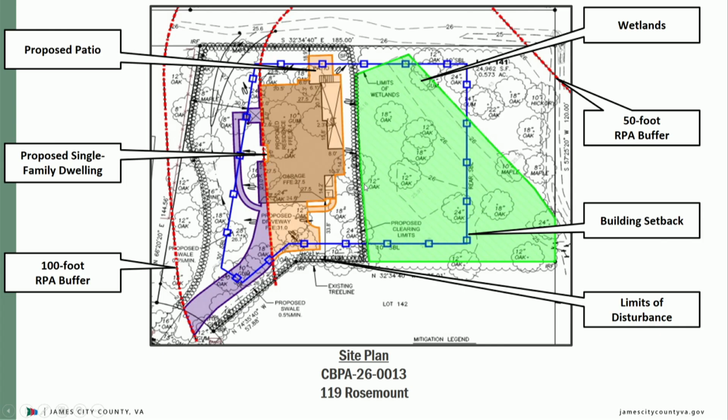Mr. Gregg, do you have concerns for the trees along that temporary fence line? There's the 12-inch oak there. This 12-inch oak will probably remain, and these 3 will come out. We'll obviously be walking a fine line there because the jurisdiction changes at those wetlands. So I believe those trees will have to be climbed and limbed down rather than pushed over with an excavator.

How about the one over here in the corner? Looks like it's sort of... down here, right at, yes. My guess is because we're not doing any grading over here, this tree would just remain. It's far enough away from the house that it could remain.

And then same thing up in the front here. As discussed, I've been looking at this lot—it's been on my radar about 2 or 3 years now. At one point, one of the things we explored was bringing in about 2 to 3 feet of fill on this lot and doing a LOMA through FEMA to bring the house out of the flood zone. That would have resulted in impacts to the actual wetlands.

So when we started working with this current client, we were able to come up with a nice, not very deep house, fitted in there with the orientation and setbacks we have. But that did allow us to keep a batch of trees also in the front, so it's going to be kind of tucked in within the woods. It's technically going to be in the floodplain.